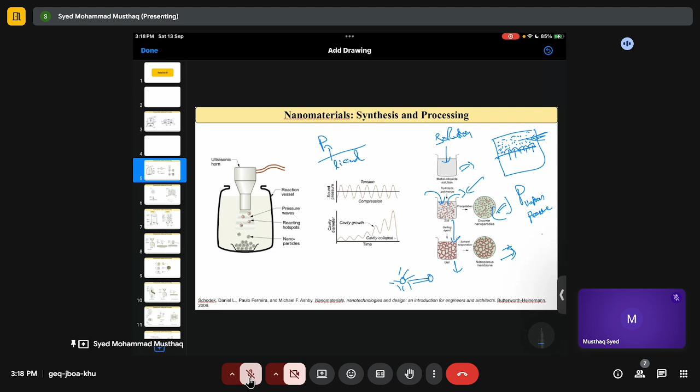Yeah, we formed nanoporous membrane, right? That's all. So for 3-dimensional structures, we use sol gel. Now if you want to make 1D or 2D nanomaterials, for that we used this guy to form a 1D thin film, right, which is a self-assembly structure, which is to form 1D films.

So again, just dispersing something in a solution, which has a hydrophobic end, so that it will not get dissolved in it, and everything is on the surface, and once you insert something and pull out, this is a substrate. So this substrate has the hydrophobic end, so these will get attached. So fatty acid will get attached, and you have a one-dimensional film. So this is a simple way of it. And then you have this

electrodeposition, right? So again, name itself suggests you deposit something by supplying some energy, and that energy is in the form of electricity, right? So yeah, and they have many names: electrowinning or electrodeposition. So electrodeposition is nothing but you have impure anode, and so I will write it instead of just blabbering. So you have a cathode, you have an anode,

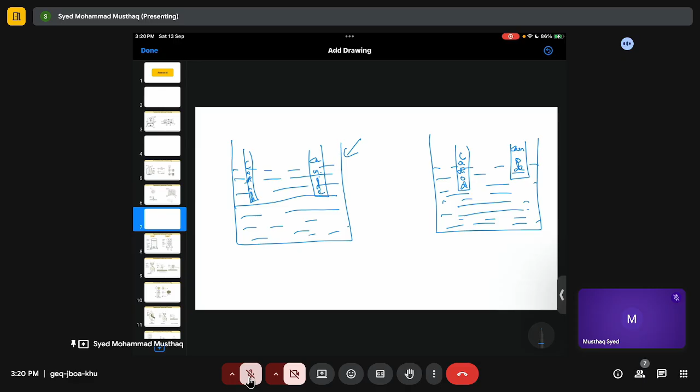right? And then you have solution. Same solution goes for here also. So electrodeposition is used when you have pure cathode and impure anode. So whenever you have impure anode, so for example this is 99.9999 pure copper, and this guy is 95% pure copper, right?

So what we are trying to do is we are trying to take charge from here. So if you give negative, if it is a positive here. So we are taking charge out. That means the copper will dissolve into the solution and it will travel through the solution and get deposited onto the cathode. That's how you create a pure copper in copper industries.

And the other way is you have a copper sulfate solution, you dissolve everything into a sulfate solution or any type of solution, nitrate, chloride solution, and then you apply negative charge here, and whatever the copper was dissolved in here, it will get deposited. So the only difference is in electrodeposition, the ions are coming from anode. In electrowinning, the ions are coming from solution. Okay, so that's the only difference. There's no great physics in there.

And yeah, here in electrodeposition, this simple deposition where you take elements from anode and you deposit on cathode. Now once we start the deposition, at first some places it will form, you will have first deposition, and some places it may not. So what happens is, again we are continuously supplying electricity, right? So instead of forming here, this guy grows, right? So you will have this columnar type structure,

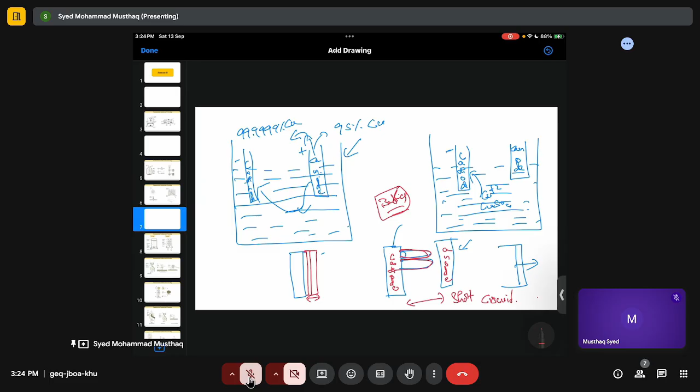Now here it is not the case. We are trying to grow a uniform thin film. So to do that, what we should do? To grow a uniform thin film, we supply a pulsating voltage. We are not going to give a continuous flow of current such that those columnar structures can grow. What we are trying to do here is supply pulsating voltages, and pulsating voltages are very simple. So with time, you stop giving the power supply. That's what we are trying to do.

It is at 0 volts, it is at 5 volts. Okay. So for time, this is 1, 2 seconds, 3 seconds, 4 seconds, 5, 6. So you are skipping voltage for every second. So whenever you do that, the film that was getting deposited first gets deposited here, then because we are, not shorting, but breaking the circuit, the next thing that grows will be here.

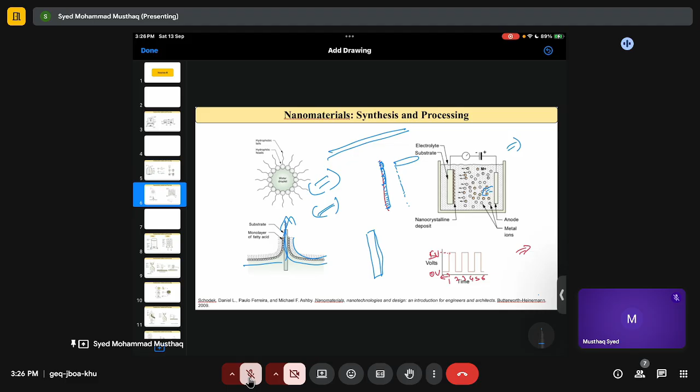Right? So that's how the whole layer will be uniform, because we are supplying a pulse, there will be only small crystallites forming everywhere. And because we are not supplying the voltage continuously. If you supply voltage continuously, then some of them may grow, some of them may not. But if you do the pulsating, every time we are giving the same chance for every particle to grow. So that's why it is a more uniform way of doing it. So that's all about electrodeposition.

And then, moving on to PVD. So in last session, I guess we haven't discussed PVD very well, right? What are the main advantages and disadvantages? That we didn't discuss. So yeah, PVD, the name itself suggests physical. Physical means the physical properties like melting point, boiling point, saturation magnetization. These are related to the physical properties of any material. They're constant. So water's boiling point is 100. It will not change, right? I mean, at 1 atmosphere it is 100.

You can boil it in London, or in India, or anywhere. It will be 100 degrees centigrade. If you're boiling it on Mount Everest, that will change, because there the pressure is very low, right? Atmospheric pressure drops, and whenever you have a drop in atmosphere, the boiling point will lower. So that's why there is this joke of boiling water on the moon. Even if you do not have a stove or any heating mechanism, the water will simply boil on the moon. Why? Because the moon atmosphere is so thin, the boiling point goes very low.

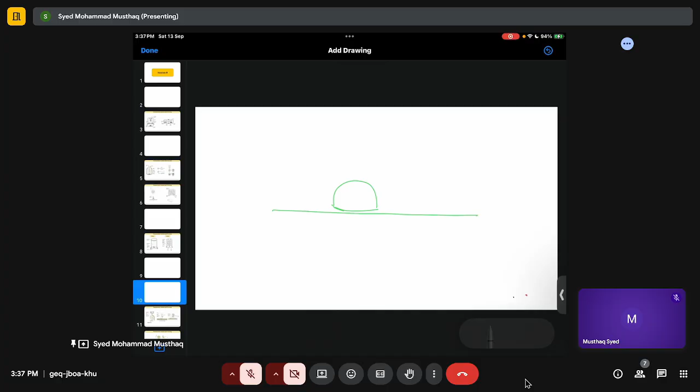And how does it spit? This catalyst will spit the nanotubes, and these will grow.

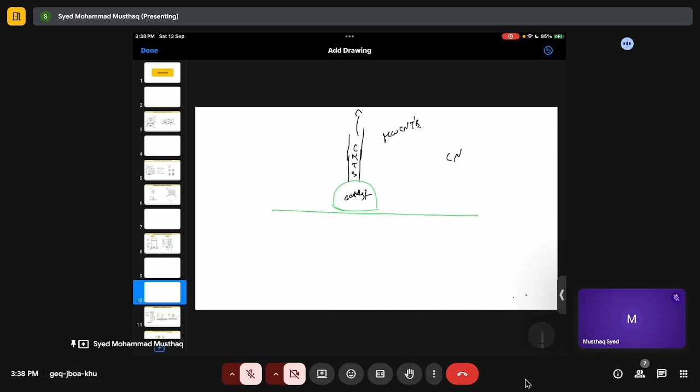That's how it happens. So this catalyst, after reaching supersaturation, will start giving out the carbon which was dissolved in it, and that carbon will come out as CNTs. And most of the CNTs are multi-wall CNTs, not single wall. It is very difficult to make single wall CNTs, and also whatever CNTs you create, again it is a CVD process, because you took organic molecules, then you did the vapor, and then you are doing the deposition.

So from CVD you can not only do thin film deposition, you can also make CNTs, and CNTs are one-dimensional nanomaterials, right? CNTs are one-dimensional because the radius is, sorry, not in angstroms, in nanometers, 1 to 100 nanometers. So our circle has x and y axes which are in the nano range. That means one dimension is not in the nano range, so that's why we call it a one-dimensional nanomaterial.

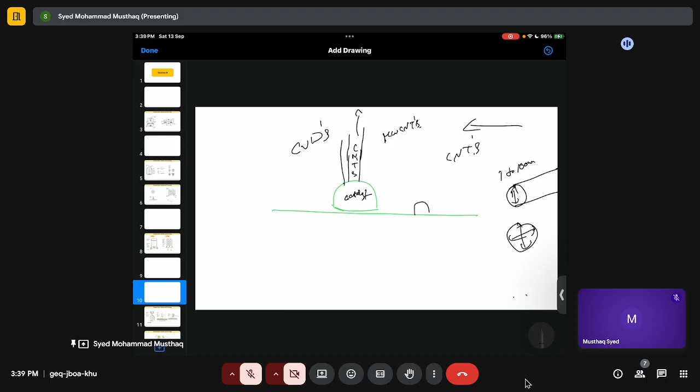So CNTs are also created, and most of the CNTs created from this are multi-wall nanotubes, not single wall. Single wall is very hard to make because you need a very fine catalyst, right? Because whenever you have a big catalyst, the CNT grows here also. It can grow like this. So that's why you see multi-wall. Multi-wall is nothing but, if this is my single wall, then you have a nested structure with so many walls. This is how a CNT looks, right? That's how it goes.

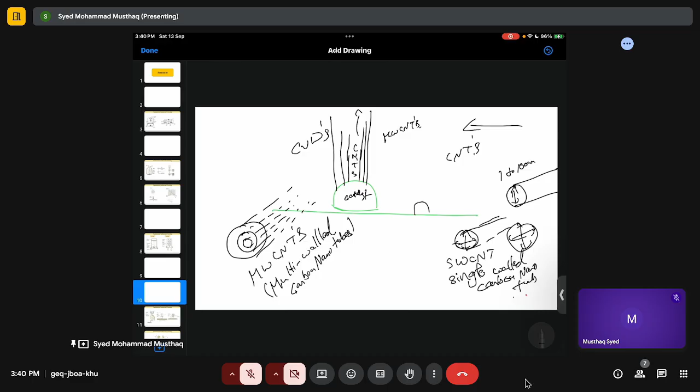These are multi-wall carbon nanotubes, and if you have only a single wall, this is a single-wall carbon nanotube, right? I hope you can differentiate. To form a single-wall nanotube, we need a very fine nanoparticle of catalyst. Only then can we achieve just a single wall. If you have a big catalyst, many walls are formed. If you have a very fine catalyst, the radius is such that you can only form one wall. So that is about single-wall nanotubes.

And in this process, you will have so much of what do you call it? The waste material, or you can call it defects. And where do these defects come from? Because of the catalyst pickup. After some time, the CNTs grow so large that they start bending, and when they bend, they might even rip out the catalyst itself, right? So whenever the CNT becomes so large, it can rip the catalyst from the surface. When that happens, the CNT growth will stop. So that's one way of making CNTs.

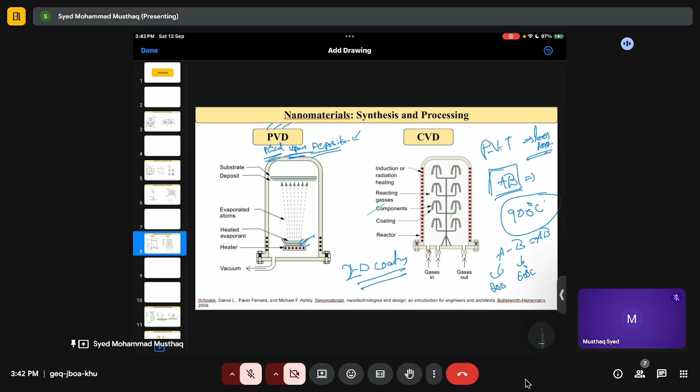We have completed PVD and CVD, and I have explained the major differences. In CVD, you can do your experiments even at lower temperatures. PVD basically takes physical properties into account, but in chemical vapor deposition you take the chemical properties of molecules. Now, the next part is rapid solidification. So what do I mean by rapid solidification?

There is a saying that if you cool things very fast, you can make glass of anything. People have tried it. One guy formed gold glass. So how did he form gold glass? Gold is crystalline, right? Gold is crystalline and glass is amorphous. There is no periodicity in amorphous, but there is periodicity in crystalline. And people have tried forming gold glass.

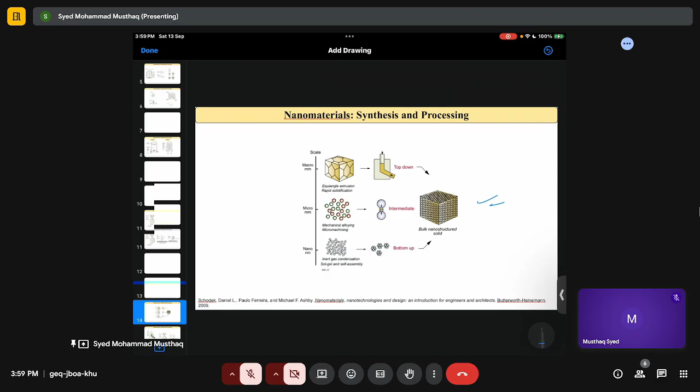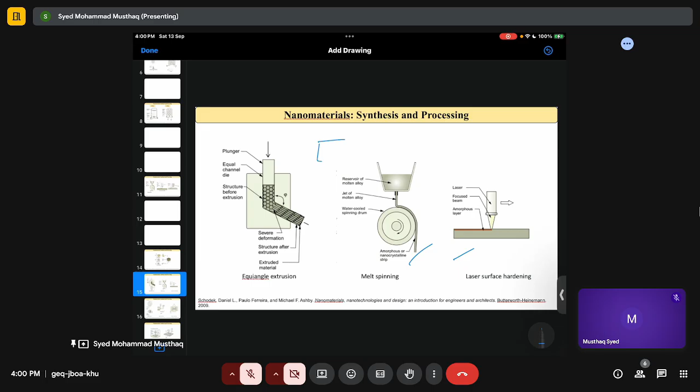Okay. Now, as we have discussed this, there is no need to discuss again. So the same laser ablation, laser surface hardening, melt spinning, and here you just deform in such a way that you have elongated grains. So let's say you have 1 mm by 1 mm, and you start deforming it,

you start stretching it, and at some point it may become 50 micrometers, and the length will be increased many times, maybe 1 meter, and if you keep stretching, this thickness may become nanometers. So that's what we are doing. We are making sure that grains are in the nanometer range.

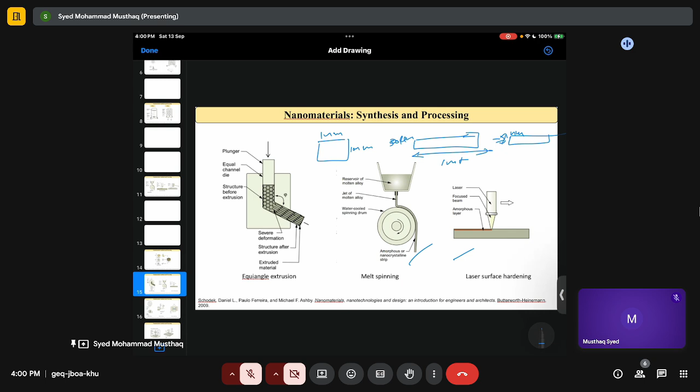And then you do powder milling. Powder milling is nothing but breaking the particles. Milling can be done in many ways. Milling can be done solely for mixing. For example, if you have A powder and B powder and you want to mix them, you do the milling. Let me write it somewhere else. So for mixing, you can use milling.

For mixing two powders, A and B, you can do the milling, or if you want to reduce the powder particle size, again, same, you can do the milling, or if you want to make a reaction, you want to

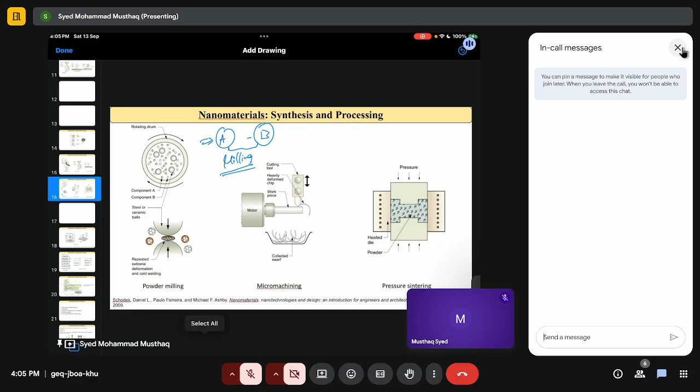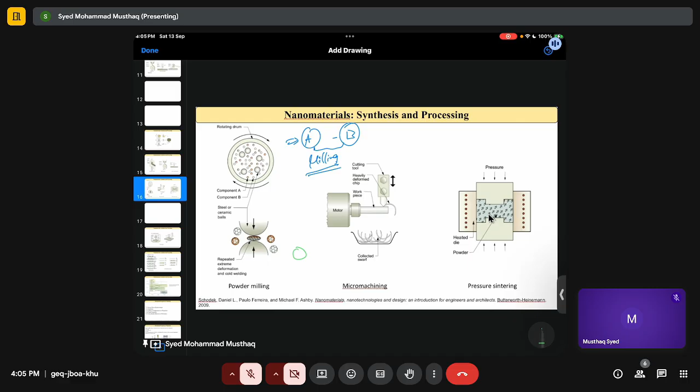the powder particle will break if the balls have high enough energy, right? If you are rotating at very high RPM, for example 120 or 140 RPM, then the balls have enough energy to break the powder particles. Again, breaking the powder particles depends upon the inherent property, whether it is ductile or brittle.

If it is brittle, it will take less time to form the powder particles, and if it is ductile, it will take a large amount of time, because whenever the powder particle comes between the two balls, if I have a brittle particle, it will break, right? And if you have a ductile particle, it will simply deform. It will not break, it will deform, just like here. So it will take lots of time to do the milling.

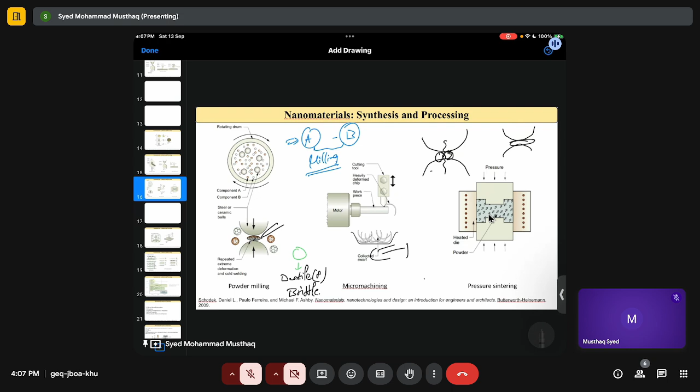And then you have micro machining. People have seen micro machining everywhere, even in lathe machines. Whenever you have a cutting tool and your workpiece and you do the machining, the cutting tool will take out chips, and those chips can also be used as nanomaterials. And then there is this other thing called pressure sintering. I guess sir has discussed spark plasma sintering, right?

Spark plasma sintering. It's nothing but you have your powder particles which are packed, touching each other when you make a compact pellet. Green pellet. For a green pellet, you apply pressure. You create a die. It has a hole in it, you put a stopper here, then you pour powder, and then you apply pressure, either by hand or with a pressure valve. So you will have a pellet.

In this pellet, the powder particles are touching each other, and then you apply current. Whenever the current flows inside the powder particle, it is okay, but when it is crossing the path, there you have a resistance, which you can call contact resistance. And whenever you have a resistance, I hope everyone remembers Joule heating, you have heat, right? And we are supplying very large amounts of current in spark plasma sintering, so that's how you have a localized melting spot.

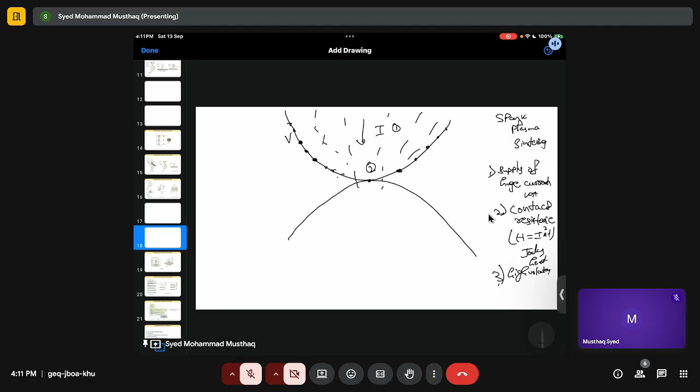So the voltage is very high on the surfaces. Why? Because the current cannot flow here, and also because you are supplying very high current, there is also voltage here, right? Current is flowing through here like this. Throughout the material, the current is flowing, right? So that means you have a certain voltage on your particle, and same goes for here also. This current will flow here. Again, you have voltage.

So let me draw in different color. Okay. Take yellow. So, okay, this is the melting, right? The fused zone. Same. So there is very high voltage on the surfaces.

And whenever you have a high voltage, for example, if there is a trapped gas in here, what we try to do, we try to purge argon or we try to maintain vacuum. If you maintain vacuum, then it is good. If you take vacuum, then it is a direct way. The current just passes through because of breakdown, right? So let's not take the easy way. Let's take the difficult way. So let's say I have air here. Okay. So whenever I have very high voltages, right? So I have very high voltage.

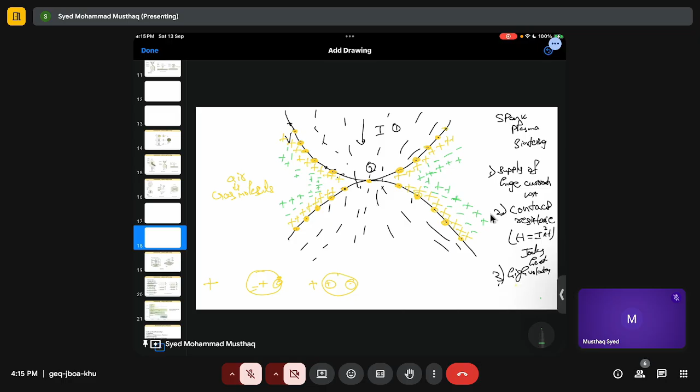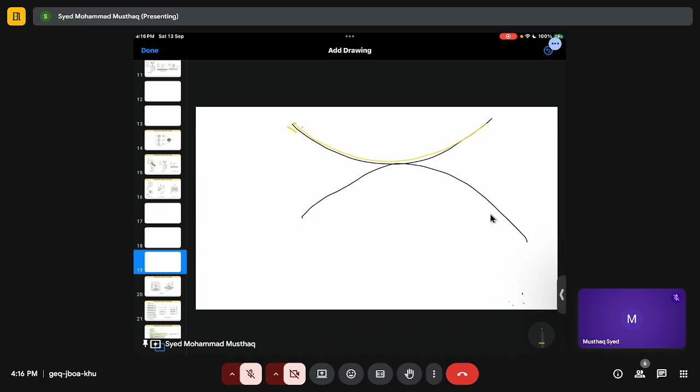So this is a very interesting theory, this polarization. That's how the thundering, everything happens. Thunderstorms, wherever you see the thunder, the same thing happens, right? So let's take yellow. Yellow was for this, right? So you have your voltage on this line, and after that you have the polarization, induced polarization.

And this polarization will not stop, and because there are very high voltages, whatever is polarized will again polarize the nearby molecules, right? Because see, this one has plus, and this polarization will result in minus plus, and this plus will again attract the minus of another molecule, right? So this layer will start increasing. More and more polarization will happen. So at a point, everything is getting covered in charges. So once you have charge, what happens?

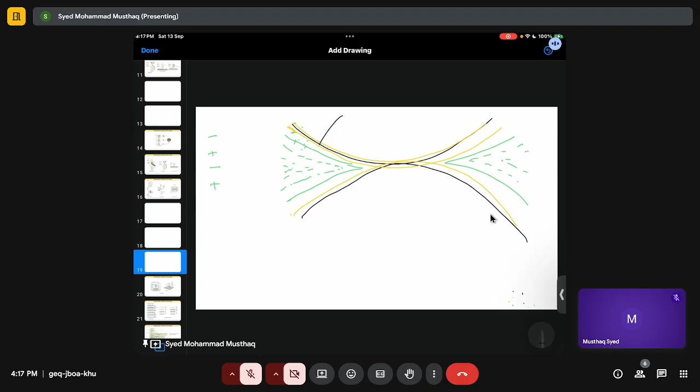My current will flow through here also. How? In the form of spark, just like a thunder, right? So I have conventional flow of current here. Here it's not conventional flow, it is breakdown voltage. You are breaking down the gas molecules,

because gas is charge neutral, but you are breaking it down such that the positive and negative go sideways, right? Just like this, the induced polarization. So you break down these air molecules, and this current will flow like this. Like this also the current will flow. How? The spark. I draw according to my imagination. So that's how the spark will flow. So then I have spark, and the next thing is plasma.

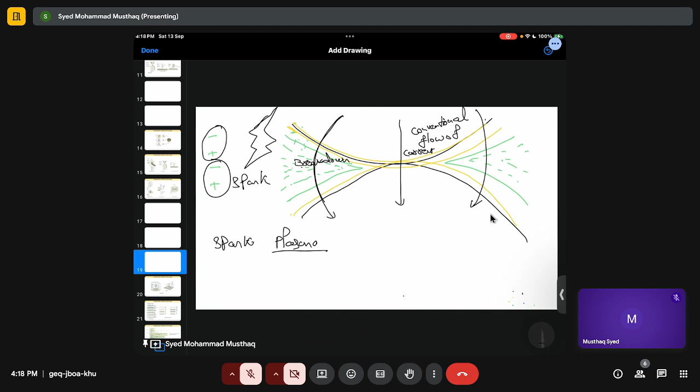So whenever you have very high current flowing through your gas molecules, very high current is flowing, right? Because you are supplying very high current, and this high current will make sure the electrons come out. This has very high energy such that you will have positive ions. The electron will come out, and then you have positive ions. So there is a creation of this plasma. So that's why we call it a plasma.

And this plasma again has very high temperature. This plasma will emit radiation. This radiation will heat this surface also. Not only this guy is getting heated, now this guy also will get heated, right? And everything becomes liquid, because these guys are heating, right? This surface will become very soft and starts melting, and then you have sintering.

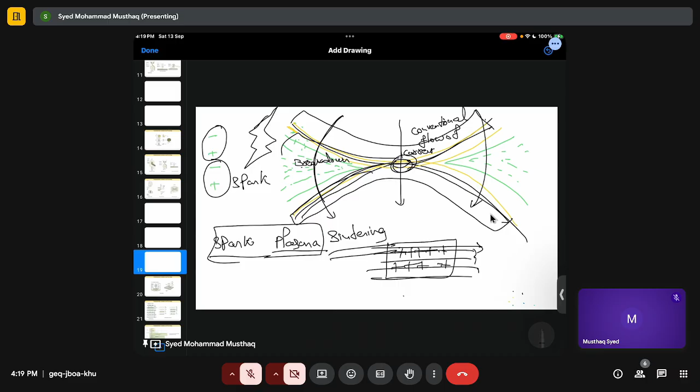The spark and plasma combined will give you the sintering effect. So that's what we call spark plasma sintering. So this is what happens there. I hope you people are clear now. Nanoprofiling, same. You take a laser, you melt very fast. You will have small nucleation, and nucleation means small nuclei, very small, in the nano range. You will have a nano profiling. That's all.

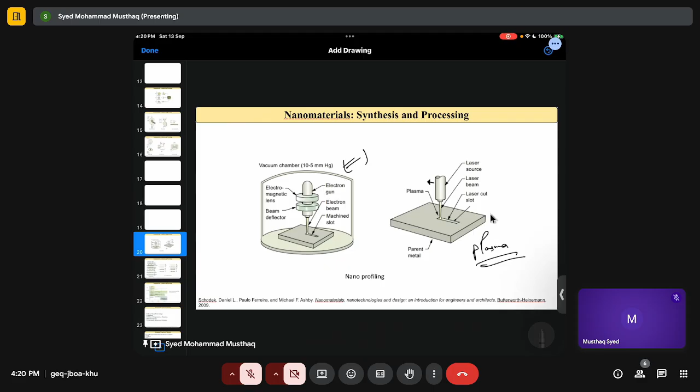Here you are using an electron beam. Electrons are accelerating, so that means energy. High energy means if you make electrons collide with a surface, they will heat it up, melting, and then you cool, nucleation, small nuclei, profiling. That's all. Here it is a laser. Here it is a plasma. Same. There's no very big difference there.

And this is very much important in semiconductor industries: it is lithography. Lithography methods are mostly the use of mechanical processes, like printing, stamping, molding, etc. Here we do not use any mechanical part. We use light. So how do we do that?

So here what we do is, our starting material is a silicon mold. Okay, so we start with the silicon mold. Let's say this is my silicon mold. Now you have silica above it, because if you put silicon in an oxygen environment, you will have a layer forming on it. This silicon will react with oxygen and it will form a layer of silica.

Then what you do is apply a photoresist material. It can be a positive one or a negative one. Positive means whenever you apply the UV beam, it will react. If it is negative, that means it will not react. That's it. There is nothing different. So here let's say it's positive, that means it is reacting.

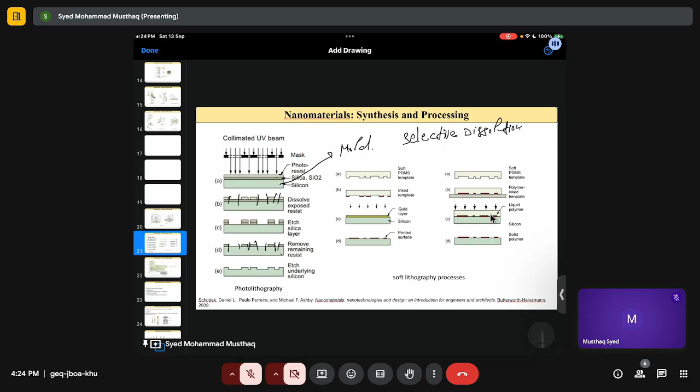Okay, so that is about selective dissolution. That means you selectively dissolve one part and make sure the other part will not get dissolved. And this is our summary. You can get this summary in the book by Michael F. Ashby, which I have been using to demonstrate everything here.

Now for particles, I have inert gas condensation, free jet expansion, sonochemical, sol gel, molecular self-assembly. And there is a small mistake here. For sol gel, I have to write discrete particles. You can use sol gel there. And then wires and tubes, CVD; I have discussed how you have a catalyst and then the CNT grows. Molecular self-assembly I have explained.

And then films: you can have micromachining or patterning, same. Focused ion beam, same. Electron beam, thin film deposition techniques, electrodeposition, my layer continuously moving. Sputtering is nothing but, suppose you have a solid, you supply voltage to this solid. This is my solid and I am supplying voltage, for example 50 kV. 50 kV is very large.

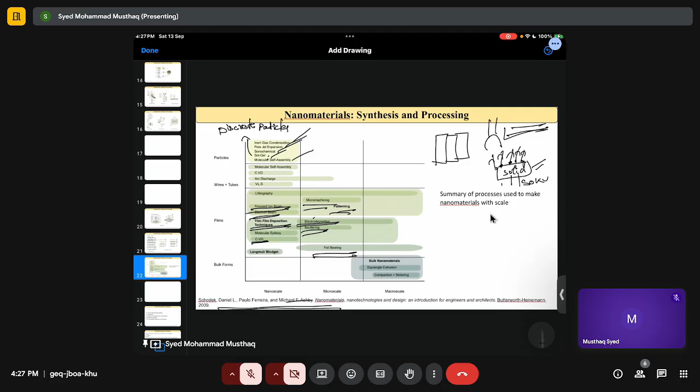So there is another thing, foil beating. I have explained this. CVD I have also explained, and I didn't explain molecular epitaxy, but I will explain it in the next few lectures. Okay. So, lithography, and in bulk form you will also get sintering, compaction, equiangle extrusion, and also sol-gel. You people have forgotten. With sol-gel, we can make discrete particles and porous 3D structures. Please do not forget this.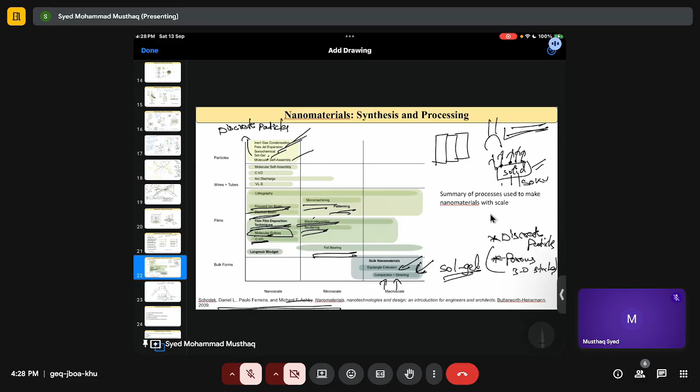Okay, now the most important part of these nanomaterials: the properties. We are coming to the next part of this whole course. The first part is the mechanical properties, and then electrical and then magnetic, because we are not going to discuss acoustic. Acoustic is mostly related to macro particles, so it will not be introduced here. So we will discuss mechanical, electrical, and magnetic. Is there optical also? How can you forget optical? Because this is where we learned SPR. So mechanical, electrical, magnetic, optical.

If time allows, we can do the characterization also. I may explain it in the last lecture, or we will have an extra session. You will get an email regarding when it is going to be. In this session I will explain how you characterize these nanoparticles. We have different machines: SEM, FESEM, field emission scanning electron microscope.

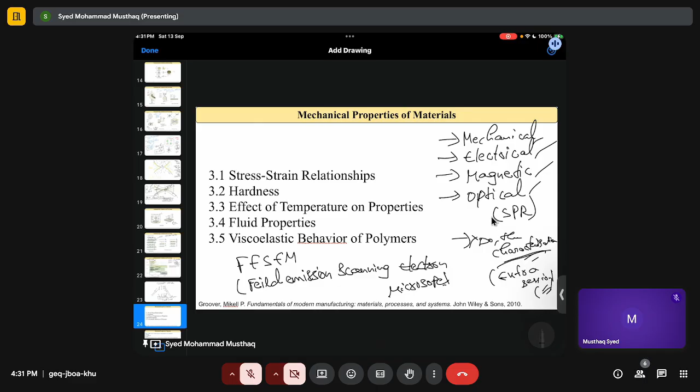It's one type of electron microscope where the electron gun is a field emission material. You apply a field, it emits electrons. And there is also a tungsten gun. In a tungsten gun, you apply voltage. It's more like thermionic emission. You heat it, it emits, right? But field emission is not like heating. You just supply an electric field at the surface, and it strips out the electrons. So that is the difference between thermionic emission and field emission. And in FESEM you can see the nanoparticles.

In TEM, transmission electron microscope, you can also see nanoparticles, and these are very expensive. And there is one way of measuring these nanoparticles, that is UV-Vis, ultraviolet visible. If you use that, you may not see or measure the nanoparticles, but you can say that this sample contains nanoparticles. It's because of SPR. That is the importance of SPR. SPR will tell you when you do UV-Vis whether you have nanoparticles or not. There is a hump forming. I will explain this when we do the optical properties, okay?

So, coming to the mechanical properties. If we only scratch the surface, we will stick with two characterization techniques. One is tensile testing, and the next is the hardness test. These two are the most widely used testing techniques to measure the properties of a material. From hardness testing, you get the hardness values. From tensile testing, you can get many things: yield strength, elastic modulus, the deformation flow curve, constant terms.

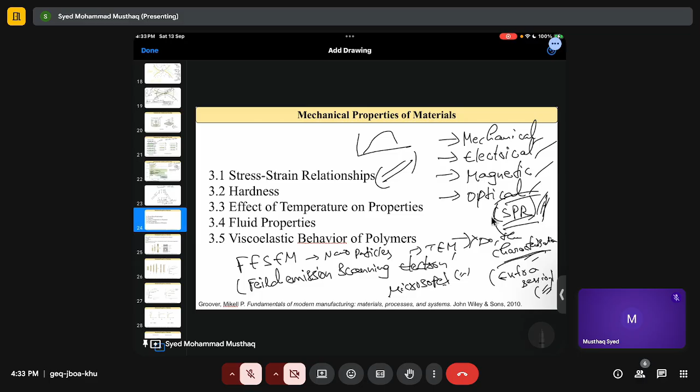So what is the ductility? What is the fracture toughness? And there are many things. Moving on, there are three types of static stresses to which the material can be subjected. It's simple. How many types of forces can we apply? Suppose you have a box, you can press it with both hands. That is called compression.

That is the one thing you can do. And the next thing you can do is stretch it. That is tensile stress. It's a compression stress. That is another, applying of compression stresses. And the second thing is the application of tensile stresses.

And the third one is you shear it. I mean, you keep one hand and move it in this direction, and you keep another hand and move it in this direction. This is called shearing, and we call it shear stresses. That's it. These are the three forces that you can apply. That's all.

And people might say, okay, what about if, my bad. So people will say, what happens if you apply a stress like this? It's simple, you just resolve it. So one component will be my shear stress. One more component will be my tensile stress. So everything can be resolved in this. Right? So these are the three types of stresses that we can apply on any material.

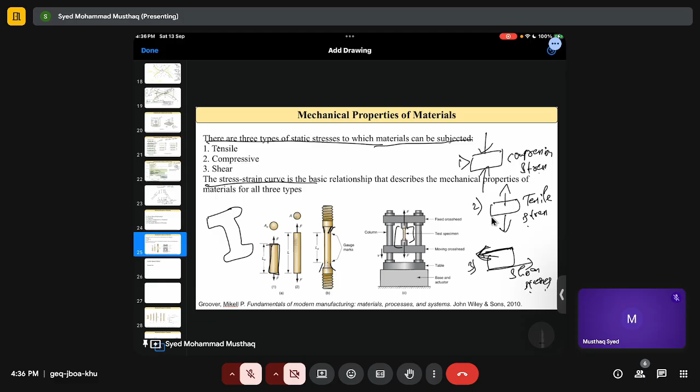And yeah, so this is my stress strain curve, and stress strain curves are of two types. One is the engineering stress strain curve and the other is the true stress strain curve. See, the basic difference depends upon what the initial parameters are. In engineering, stress is nothing but force upon area. This is the initial area. Okay. This is for engineering. For true stress strain, the stress will be equal to load upon the instantaneous area. So it's like instantaneously you are measuring the area and then you do the calculation.

So we mostly use the engineering stress strain curve because that is easy to visualize and understand when compared to the true stress strain curve. Okay. So the true stress strain curve is mostly used for industrial purposes. Okay. So for basic level understanding, you can use anything, but people prefer engineering stress strain. Okay. So at first the material will behave as an elastic one. Okay. So when you increase stress, let me draw something.

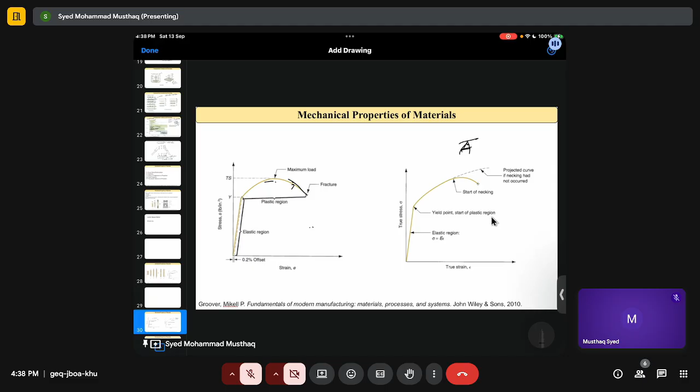Yeah, this is the difference between the engineering stress strain and true stress strain curve. Okay. So because my area is constant, it doesn't depend on area, it only depends upon load, so that's why it will get decreased. But here my area is also decreasing, that's why this value gets increased. That's all. Coming to here.

So yeah, I have prepared my tensile sample and I put it in a tensile testing machine and it starts stretching it. So at first my particle will behave as an elastic rubber. If you stretch an elastic rubber, it will regain its original position. The same goes here. If I apply stress, it will elongate, and if I remove stress, it will come back to its initial position. The same goes if I apply more stress, it will elongate even more, and if I remove stress, it will again come back to the same position. So more like a rubber band.

And once I reach a point, which is called the yield point, and there are many points where, see, it's very difficult to define. Okay, so you have an elastic region, you have a plastic region. So the next part you see is a plastic region. Above this part is plastic, below is elastic.

I shouldn't say after this point it is plastic, below this point it is plastic. Okay, elastic, sorry. So now how do you differentiate when to start plastic, right? There are many debates on these things. So people have created many points.

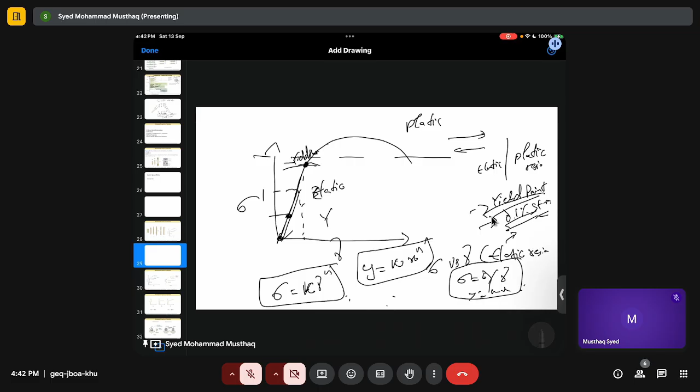Because it is a curve, you need to have an equation like this. We do not know what the exponents are. And here we have perfectly elastic. There is no permanent deformation. It's just like a rubber band.

And here it is perfectly plastic. What do you mean perfectly plastic? That means once you reach this point, you need not increase stress. The material will continuously deform, just like water. If you try to disturb the surface, it will move itself and rearrange.

Same goes for it. All you have to do is reach this point and maintain that stress, and it will continuously deform itself. That will be called perfectly plastic. And this one is for metals, which we see.

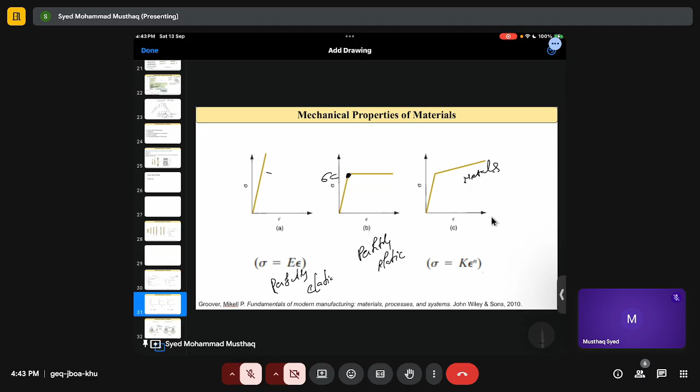Now, the other testing is hardness testing. In hardness testing, you have Brinell and Rockwell. So why do we have different types of testing? Because the material hardness is not the same. For example, iron has a higher hardness compared to aluminum.

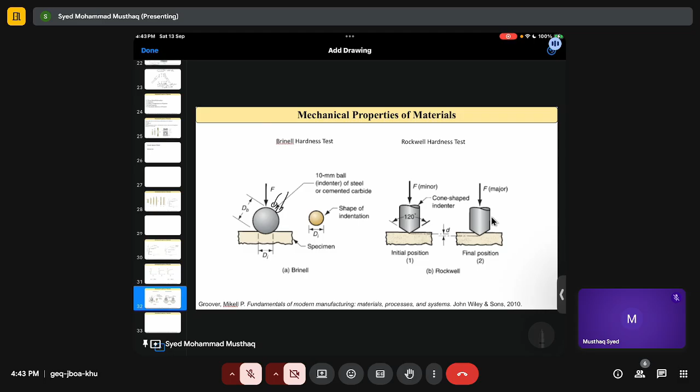You cannot use a single process, because the material which we are using to deform the material may not be tougher than the material you are trying to deform. So then you need to change your hardness testing. It's basically which hardness material you are using, what grade of hardness, and what you are trying to deform. Okay, so that's all.

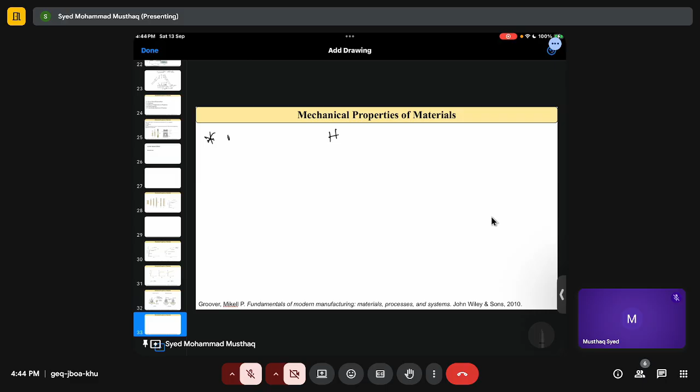Now finally coming to this deformation part. Sir has derived very complex equations for this Hall-Petch relation. So what I'm trying to do is give a very simple relation instead of so many things. Whenever you have a grain boundary, the deformation happens via dislocation motion.

So deformation takes place in two ways. One, dislocation motion. Two, twinning. Dislocation motion is movement of one atomic plane at a time. But twinning is a collective movement of atomic planes. It is a vague explanation, but it helps to understand. You can look into it and see the main difference between dislocation motion and twinning.

In dislocation motion, every time you have only one or two atomic planes moving. In twinning, you have a collection of atomic planes moving at a time. Twinning is seen in HCP, BCC materials, and dislocation motion is seen mostly in ductile materials, FCC, BCC. And deformation is nothing but dislocation motion, and it's not like a grain has only one dislocation. For example, the dislocations are moving,

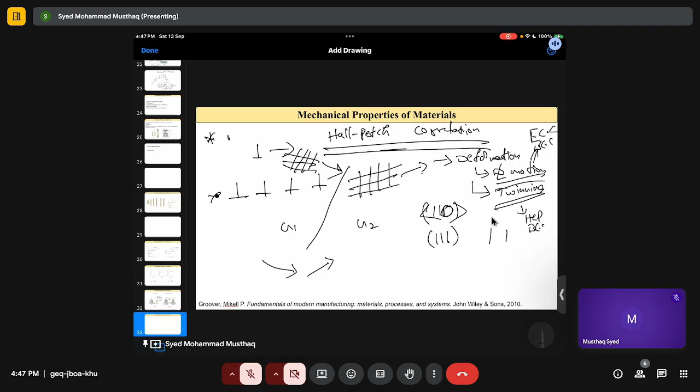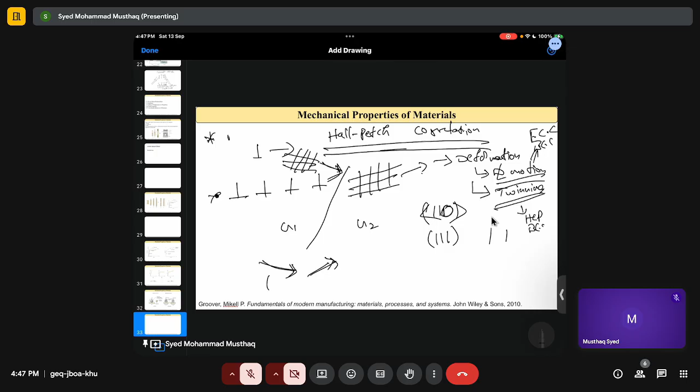In grain 1, the 110 direction is like this. Here the 110 direction is different. Then how will this dislocation move? So here comes the problem. This is my grain boundary. Now I am applying stress. That's why my dislocations are moving. And once they reach a grain boundary, they start getting piled up. And because of this pile-up, there is also back stress.

Right now, this stress will be resolved. So whenever you have a stress applied on a surface, it will be resolved. So you will have resolved shear stress. This is a shear stress, right? Resolved shear stress. And let's say the number of dislocations is n, and tau c will be the critical stress

required to initiate dislocations or move the dislocations from one grain to another grain, or initiate the dislocation motion on this grain. So this is called the critical shear stress to initiate a dislocation source in grain 2. This is grain 1.

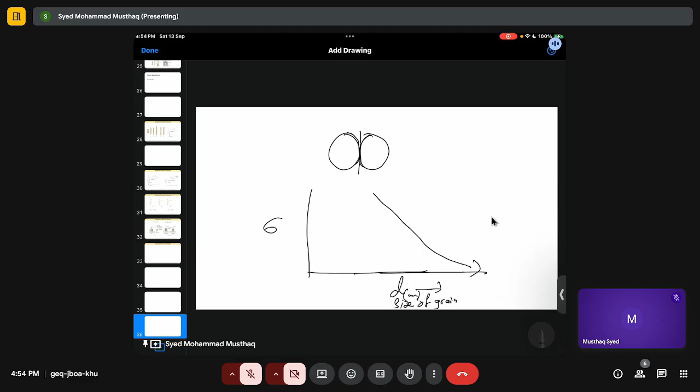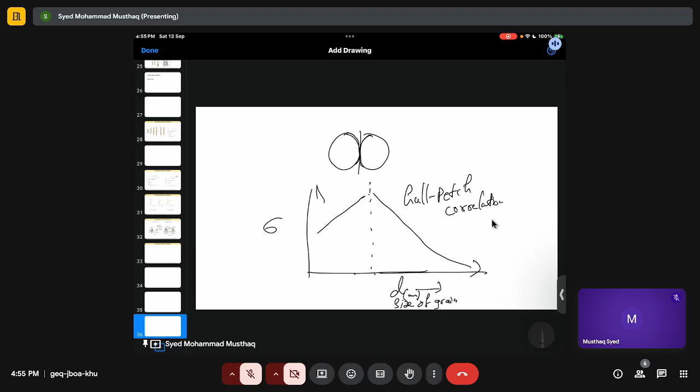See, this is the grain size in nm. It will increase to a certain value and then start decreasing, because dislocations are very hard to accommodate inside nanoparticles, and these nanograins also slide on each other. So here you have the Hall-Petch correlation, and this region is called the inverse Hall-Petch correlation. That's it.

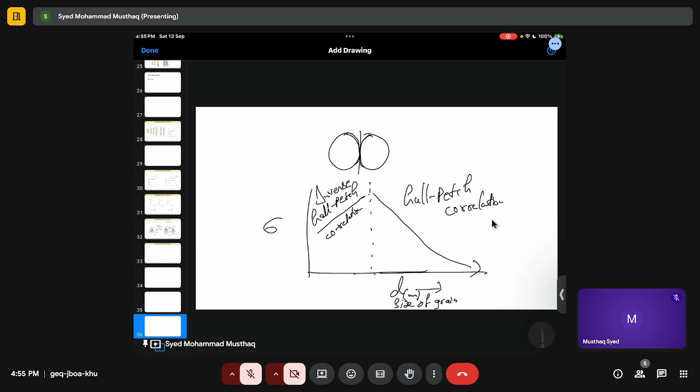Okay. I hope you were able to understand this part, because this is the easiest derivation; you cannot get simpler than this.